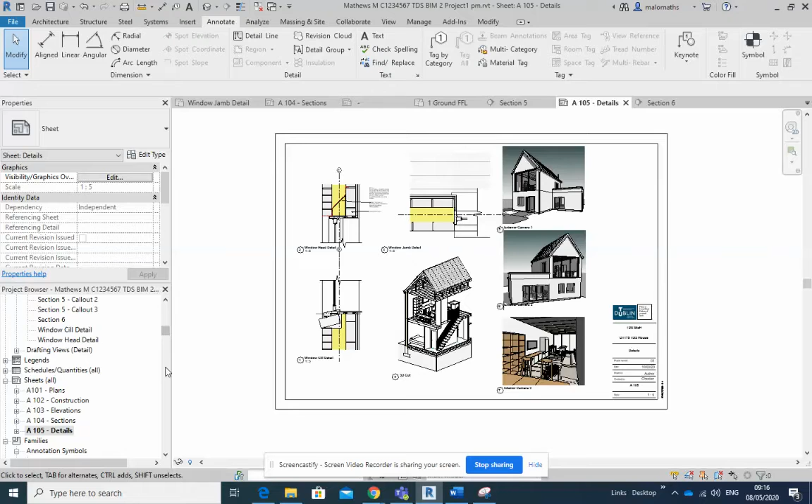Now, we have detailed up section 5 here, and I've gone into a little bit more detail off screen, and that's what I mean about drawing in the water tank system there.

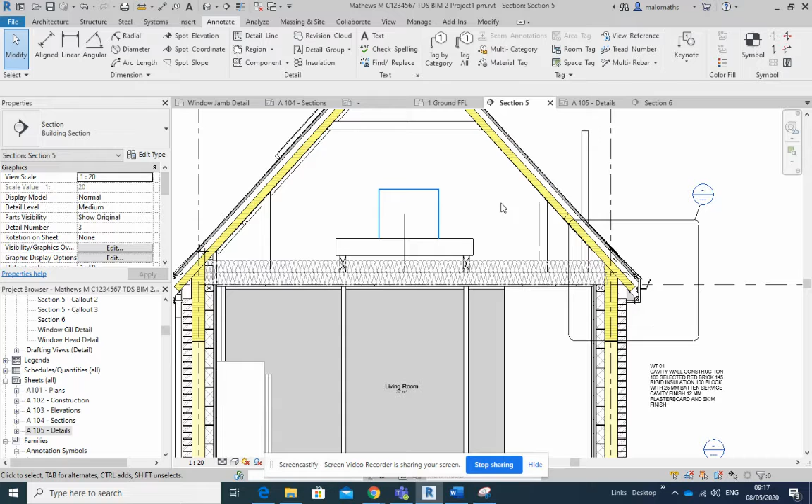I've drawn in some quilt insulation here, and what I like to do with quilt insulation is to pick both of them, right click, override graphics in view by element, and set it to half tone. I just think the lines are quite dense, so when you print them out they can be quite strong.

Now, if we're insulated down here and we're insulated up between the rafters, then there isn't particularly a necessity for insulation around that. But again, you can ask the studio staff about that - some of them might prefer you to insulate it.

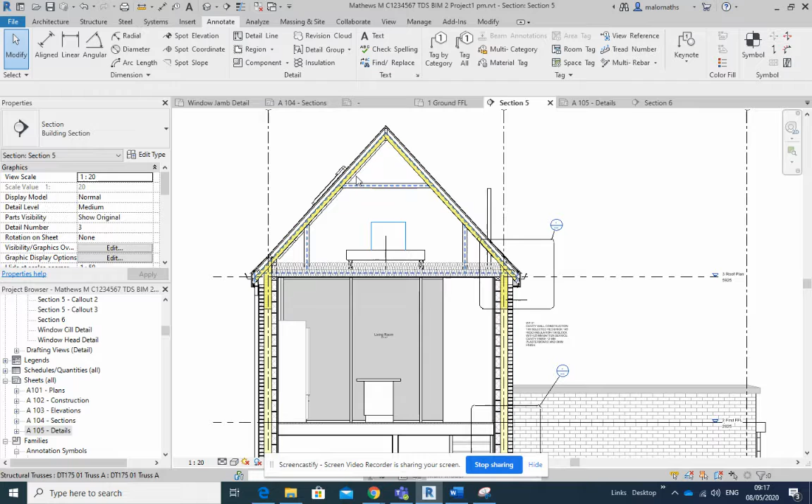You would generally insulate around the tank if there was no insulation up here, only quilt there, because that would be a cold zone. But if we're going to insulate between the rafters, then there's not a cold zone there, and that'll be it. So tidy up your detailing.

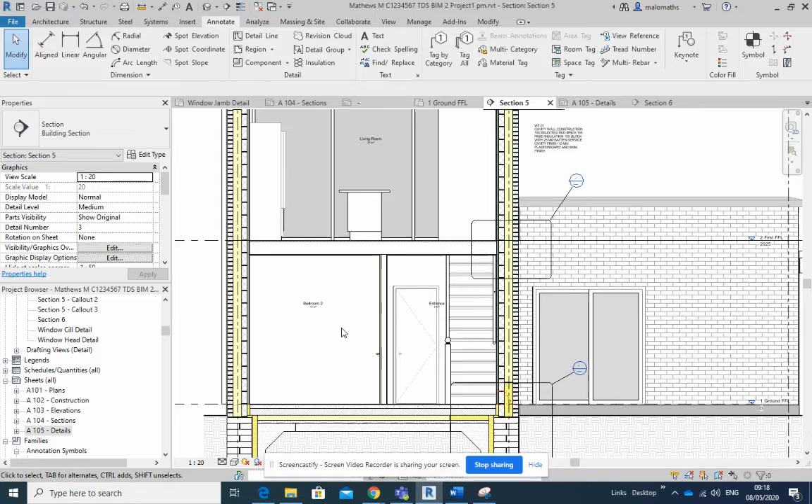So I mirrored across our edge insulation there, slab edge insulation, and here at the block detail lines and that type of stuff. I should mirror across the DPCs there as well. Now, it's a pity there wasn't kind of a window here or there, which would have taken care of the other problem we have in terms of the detailing here.

And I'll go back into the detail sheet. So here's my detail sheet, and what I'm going to do is rearrange this. I'm going to pick these three - I'm not getting rid of these, I like these, I'm just going to move them out and across the way a little bit.

And you two, you're going to come out and across the way a little bit here too. Now, those are the jamb details and that type of stuff, so I'm going to take you and shove you across here.

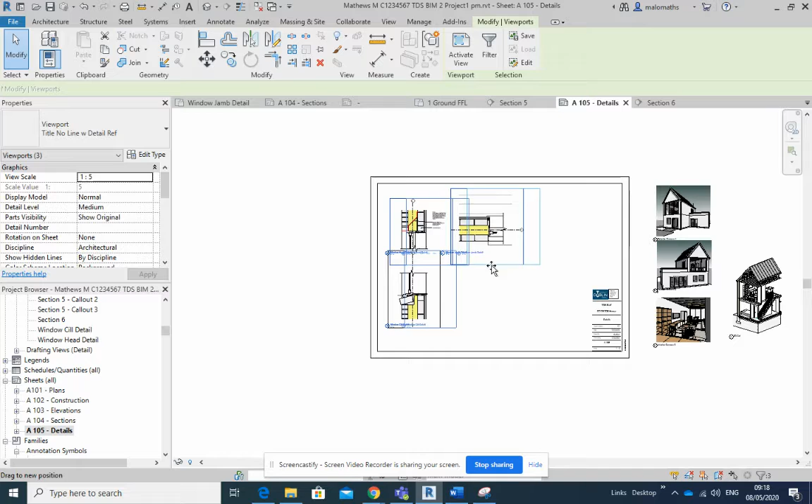Now, if you remember, we created these by creating a new section 6. So I'm grabbing section 6 here, the view, and bringing it across, and I'm going to position it something like that there. I need to go into this section 6, so that's at 1:20, that's grand.

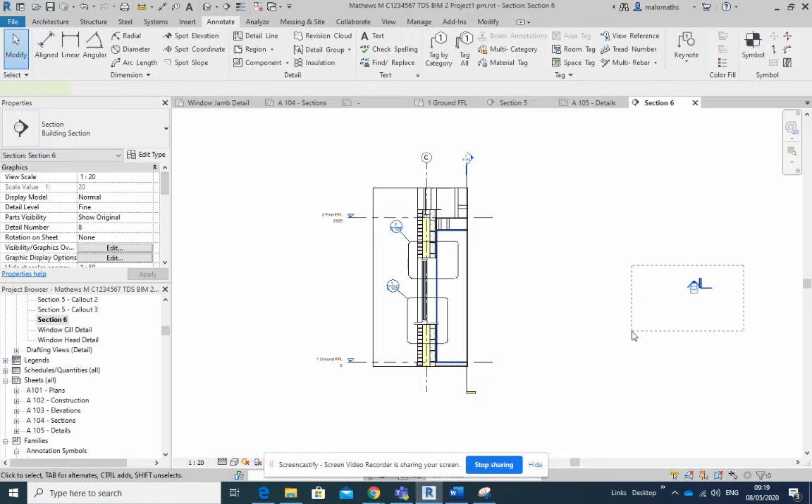I need to just take these items here and go hide in view elements. So right click, zoom to fit - that's the way I wanted it. Okay, and I'll turn off the crop box here as well.

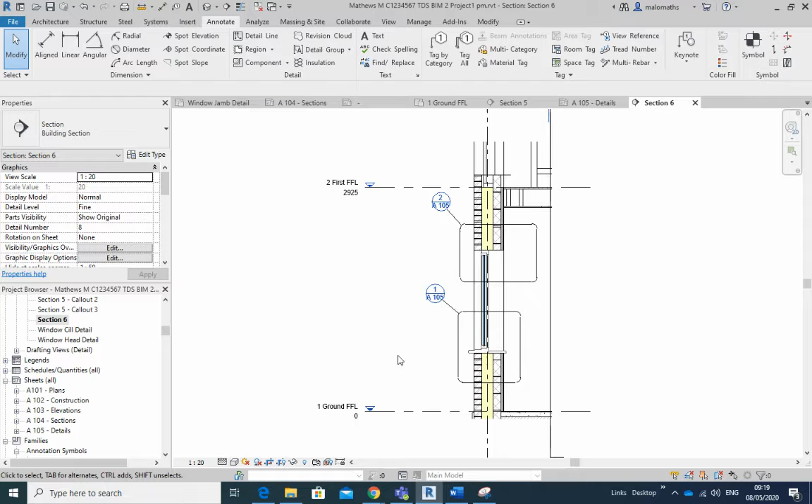Now, so we've got this detail call out marked here, and this detail call out marked here. Back to the detail sheet. I'll just swap out that title block for the one that we use here. Now, so there's my 1:20 section, and here are the 1:5 details corresponding to that.

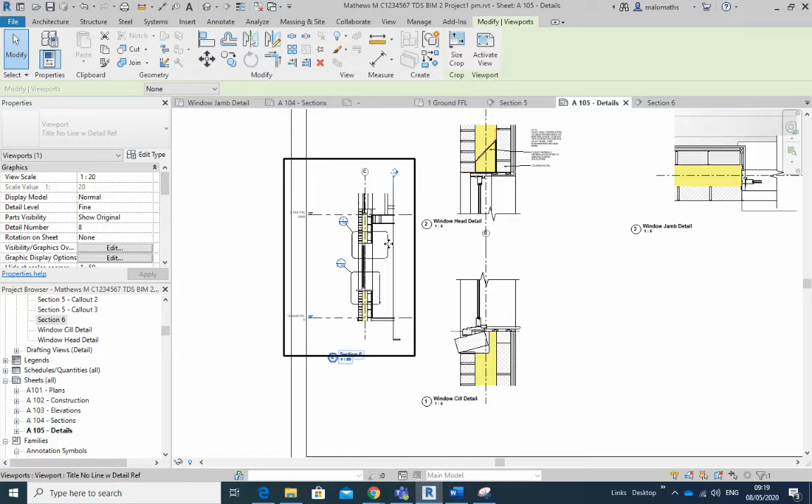Just line those up there. Okay, I'm going to get this one over a little bit more. Okay, I'll fix that up there in a second.

And then here is the jamb detail. Let's see if we can get that up there. Okay, again using my arrow keys here just to get that into position. Okay, so there's our kind of detailed set there.

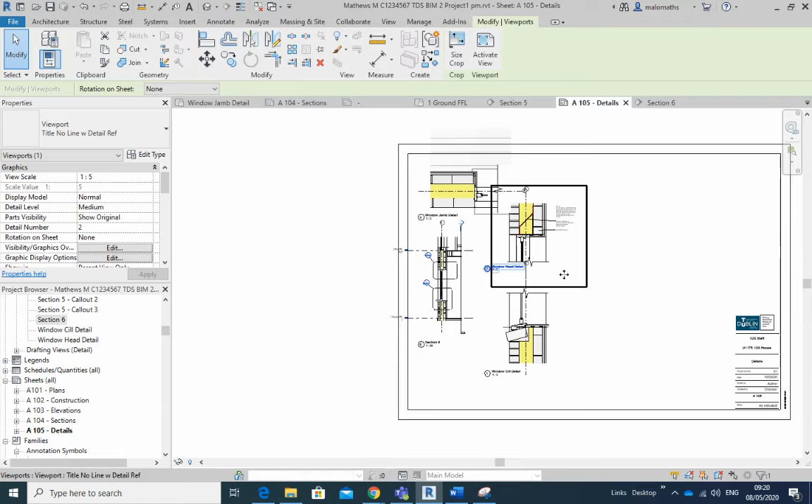And just grab these three here. All right, now that's what Anne is looking for and the team. So that's the requirement, that you have at least those three details in there. We know we've got more details, so there's a choice here.

We can either take those details - and where are they? Here they are, the call out ones. So we could populate some more details in here if we wanted, like so. Now, if you remember, what we did was delete the view, and like so.

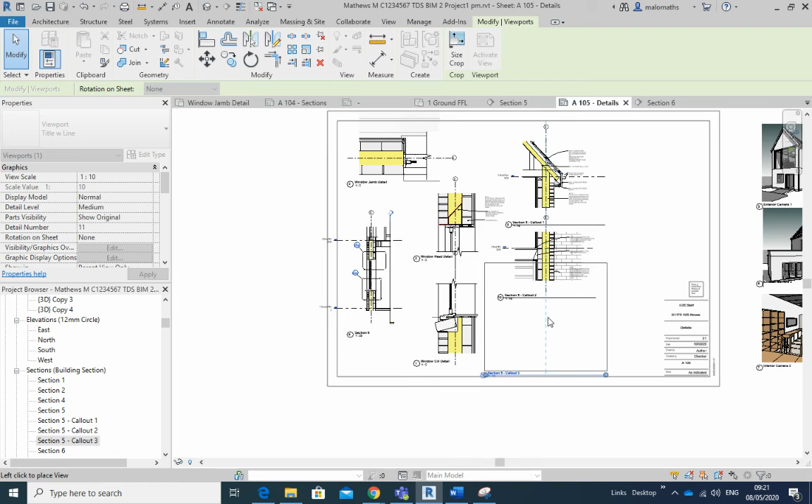Okay, something like that there. All right, now let's move that one up. Now, so we're starting to see what's going on there.

So we've got a nice set of details going on here. And what I'm going to do in the next video is resize these and drop them in here, and I think that would kind of complete your detail sheet.